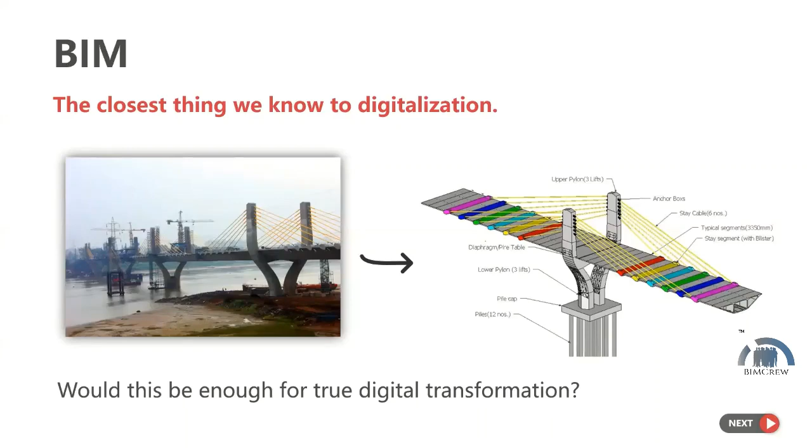I have given you an example of a bridge project and its BIM model here so you can see the BIM process and actual product. So when we evaluate all those ingredients against the BIM execution plan that we commonly find in the recent market...

We found that the BIM execution plan has limited ways to highlight pain points. There is no way to highlight pain points because the approach is basically product based.

All of you have heard that the BIM acronym has three different interpretations. First is building information modeling, building information model, and building information management. So we need to figure out which one is fitting for our needs.

Second, our BIM execution plans are such that they don't support collaboration, and they limit the definition of collaboration.

That we have seen. Third is restricted BIM knowledge. Only a few are well known for their BIM implementation.

The key to implementing BIM in a very good way is to enable it across the entire project base or entire project user base. However, our BIM strategies or BIM execution plans are not prepared in such a way that it percolates the knowledge.

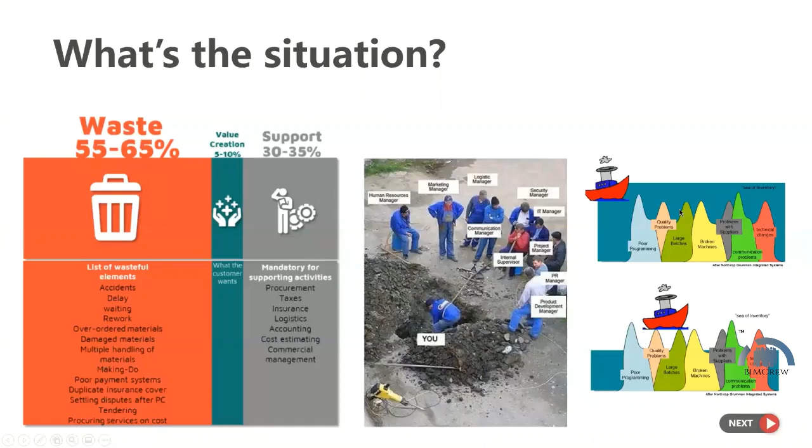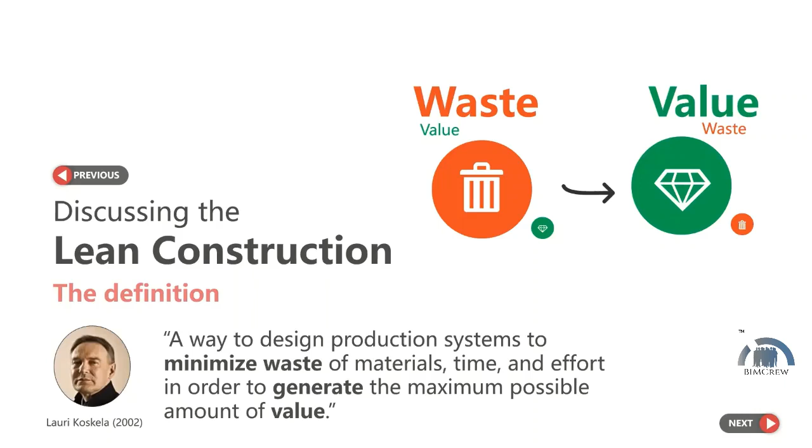That's why we have lean construction practices in the construction field, where we focus on minimizing the waste and increasing the value. Professor Lauri Koskela was one of the founders of lean construction practices, where he took lean processes and infused it into construction.

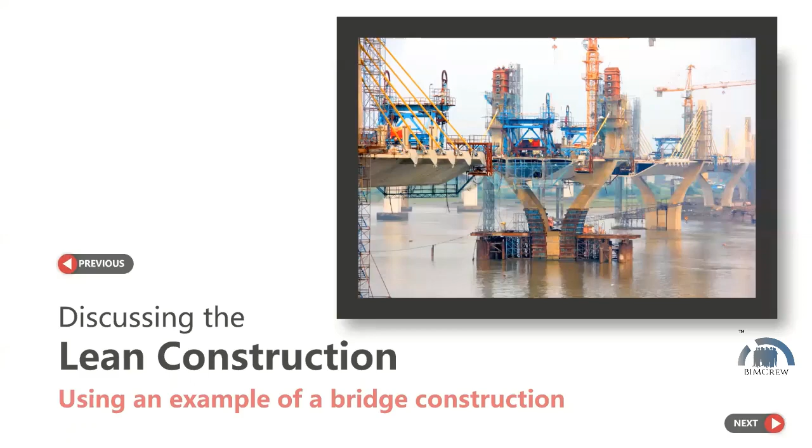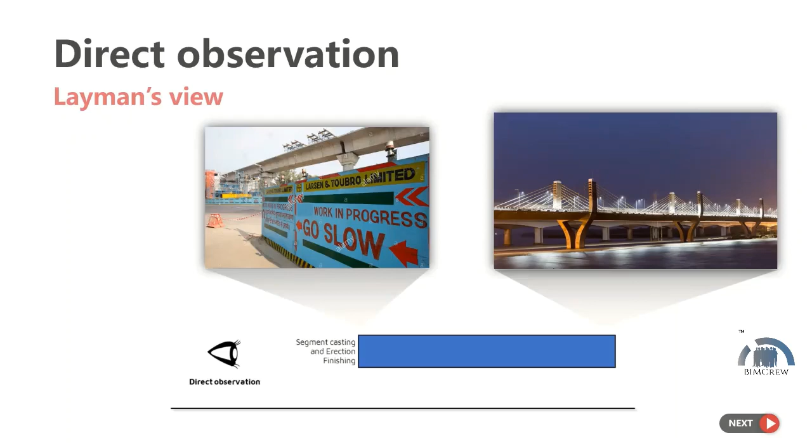If I can quickly elaborate how it works using this bridge construction activity, it could be like this. Whenever a common person, a layman, observes any construction practice, let's say for a bridge construction, he would see a board saying construction is going on, and at the end of the project, he would get the final project and be able to access it.

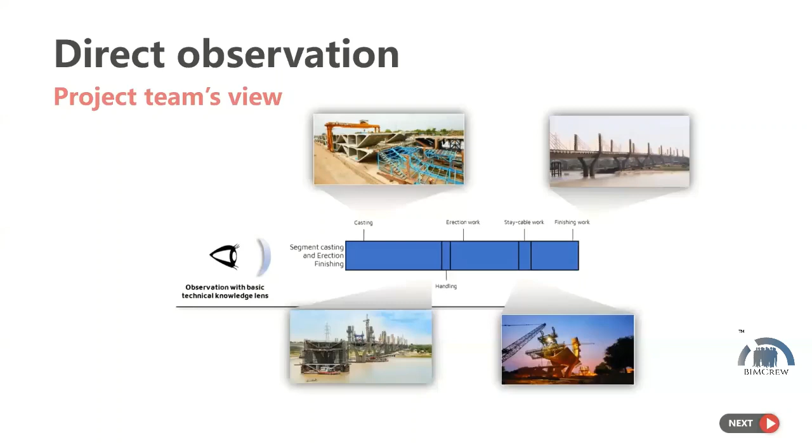However, whenever a project team member views the construction process, they can see in more depth. They will be able to see casting work going on, handling work, erection work, cable staying work, finishing work—all sorts of work they can identify as they have firsthand experience. They develop some technical knowledge-based lens in their eyes so they can see all these processes in chunks. However, the lean view is like this.

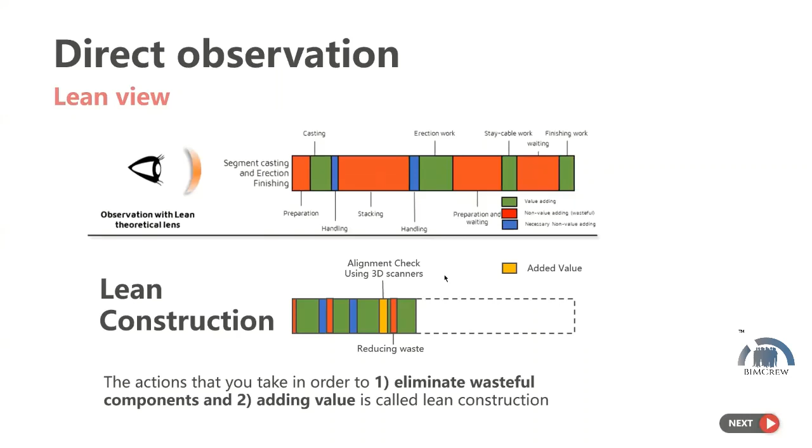In a nutshell, if I want to summarize lean construction, it has six major aspects, or six major fundamental tenets. First, don't try to optimize the chunks. You don't need to optimize one process, you need to optimize the whole to get a better result.

Second is removal of waste. First of all, you need to realize the waste in your processes. There is a very important saying in lean construction: whenever you try to evaluate a process, you need to develop such a critical eye that you can see the waste. Unless and until you realize the waste, you would presume that everything is working fine. So you need to develop a vision and always have a strategy to remove or reduce waste.

Whenever I say waste, it doesn't just comprise construction material or materialistic waste. It also comprises overproduction, waiting time, unnecessary transport, over-processing, excessive inventory, unnecessary movement, defects, and unused employee creativity. All sorts of waste we need to eliminate.

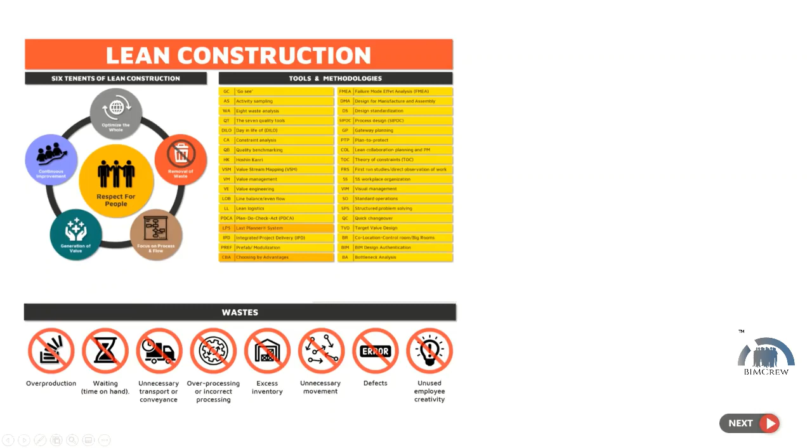Regardless of everything, we ensure that we develop some sort of environment where we have respect for the people. So if I try to correlate this with the McKinsey ingredient list, it will perfectly satisfy the majority of requirements in terms of people and the process aspect of it.

So lean construction develops a vision to see and fix pain points. It provides an interactive environment that promotes collaboration. Also, reskilling and restructuring of the engineering team is quite essential to implement lean construction practices. Fourth one is focus and capture the true value. So as we have mentioned over here, its fundamental focus is on generating the value. So that's where we are getting.

And the last one is connect projects and share lessons learned that we can gather from lean construction. You can see the tool set of lean and lean philosophy over here that can be used in construction. If you want to refer to it, I can share these slides with you. So in a nutshell, it usually takes care of the people aspect and the process aspect of the cycle, but however, it is lagging behind in technology.

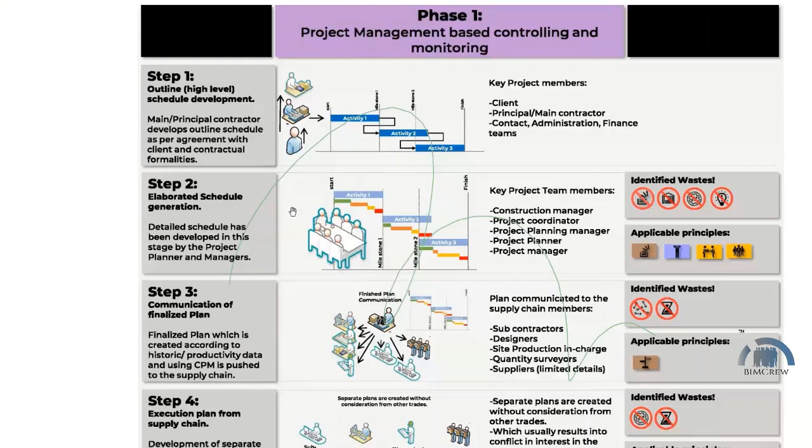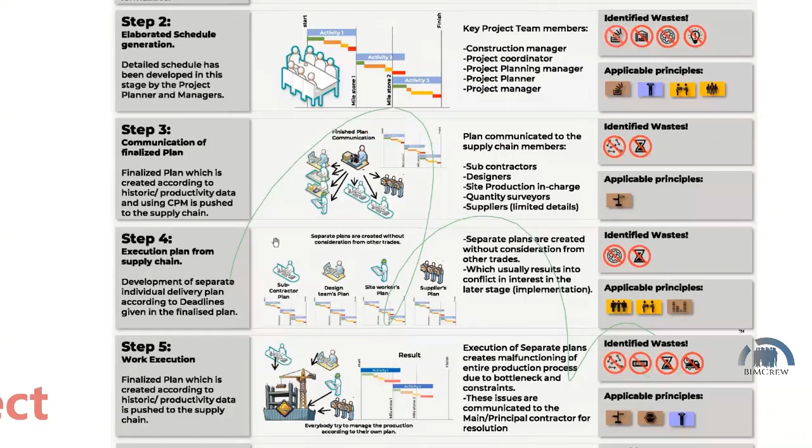So in the process of delivery, this is the previous state before the implementation of lean and BIM integrated practices. They had this baseline schedule, which was further elaborated by the project planner, and then it was communicated to each and every subcontractor. You can see then the subcontractor tries to develop his own plan, and then all together they try to deploy or implement it.

Later, one project coordinator asks all the subcontractors to give feedback about the status of the progress, and later the team arranges a meeting where they try to investigate what exactly went wrong and what were the issues in the implementation.

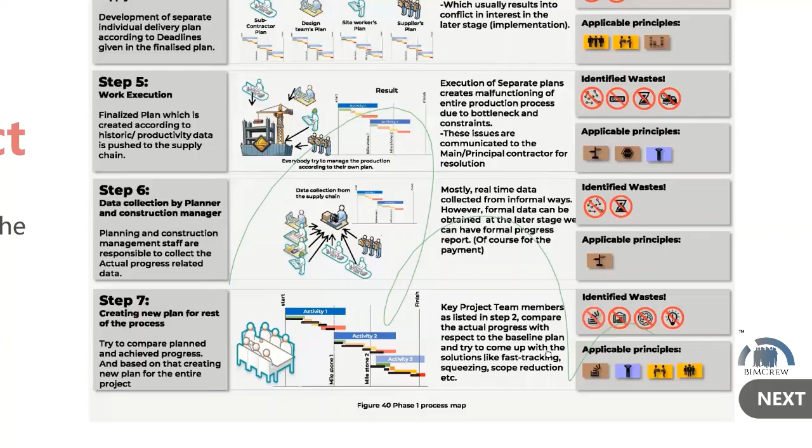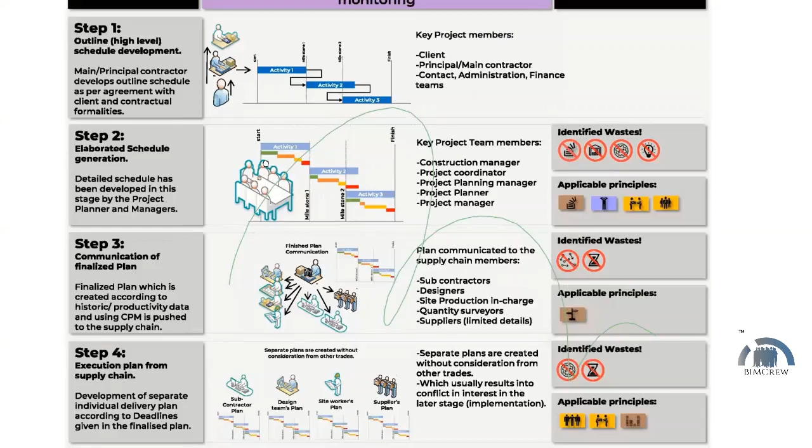However, you can see one another column over here where we have identified enormous waste in this process. You can see they are developing a project plan for the entire project. So that's why they are getting 20,000 line items. Anyway, they are going to shift those 20,000 line items as they progress. So the fundamental waste is overproduction, where they are supposed to be targeting a 3 month or 4 month plan and try to elaborate then, rather than elaborate everything that has been found in the process.

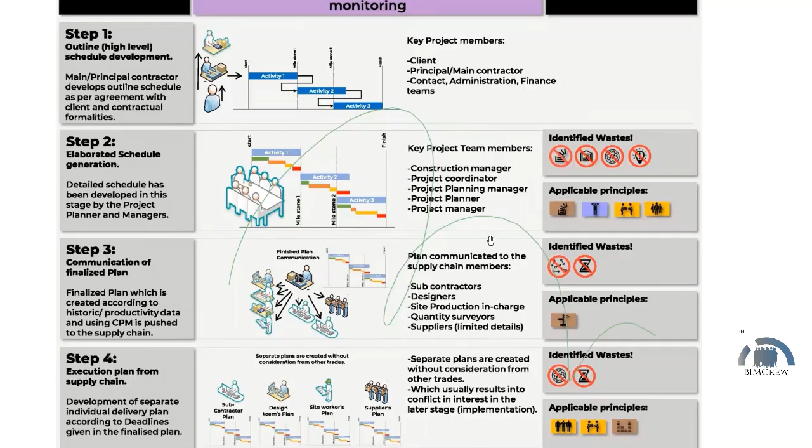Accordingly, you can see all the waste that is there in the process. So what exactly were they doing to the entire system? These are the few observations that we found out. First of all, manual information delivery hampers efficiency. People were running around with all sorts of construction drawings and construction information. They were coordinating using emails and WhatsApp trails and whatever medium they have. Therefore, there was no centralized approach to get information, and the workers or the end users were finding it very difficult to get the information out of the entire system.

The second observation was there are multiple sources of information. As I mentioned, if I want to know the progress of any activity, I can get it from a package manager, as well as from a subcontractor, whatever involved parties are there. However, there were a few instances where we found mismatches in that information. Again, the latency in progress update. Whenever the project manager asks for the information, they have a frequency to deliver it every 15 days or on a weekly basis. So in order to have proactive decision making, I should be knowing the exact current state of my construction activities to get everything sorted.

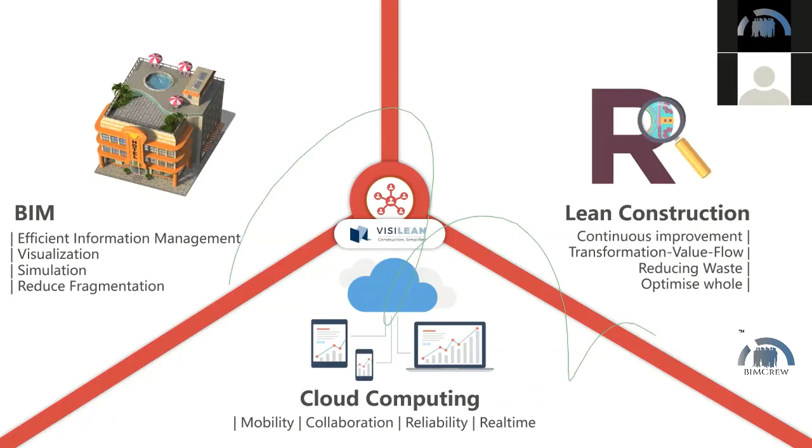And lean construction provides continuous improvement, transformation, value flow, reducing waste, and optimization, and VisiLean provides cloud computing capabilities where mobility, collaboration, reliability, and the real-time nature of the system give a boost to process management. So in the next phase, we delivered Lean BIM integrated project delivery, where we used Revit as a modeling tool, P6 as a scheduling tool, VisiLean as the Lean BIM collaboration tool, and the Nureva wall was used. I'll show you in a while how exactly the Nureva wall works.

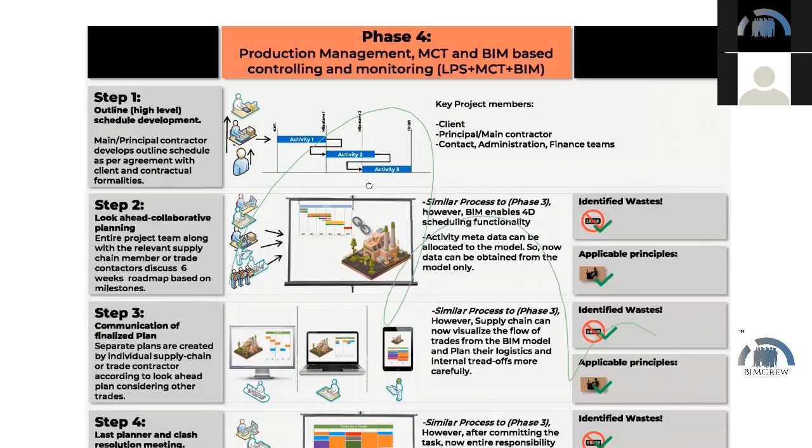But the improved process looks like this. So now we have a baseline schedule where people are in the collaborative room. They are trying to plan and figure out what exactly the process is and where exactly the planning as well as model clashes are going on.

Then in the third step, the subcontractors try to develop their own schedules in conjunction with their fellow subcontractors so that they don't clash with each other. In the fourth step, they try to have a collaborative session where they discuss the clashes. In the fifth step, all the end users were provided with the mobile app where they can update the progress from their mobile itself.

So they can be seen over here where end users are using their smartphone; in other words, they are using mobile technologies to let the higher management know about the current process. And the next step was to evaluate exactly the state of the production. So by implementing these steps, we achieve the waste elimination and also the value generation aspect of lean. I can quickly show you in this.

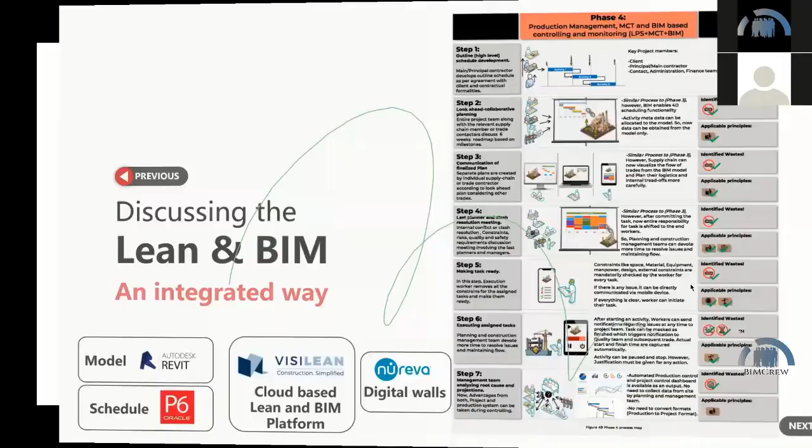I got an alarm that my time is running up.

But yes, so this is the room that we have set up. You can see the 3D model live in the BIM in VisiLean, and you can see the schedule over here, the master plan. So whenever you click on any of the model, it will directly take you to the micro level schedule over here, and you can see whatever activities are going on on the model itself. Also, the information which is necessary to execute that element is linked with this task so that nobody needs to chase the information.

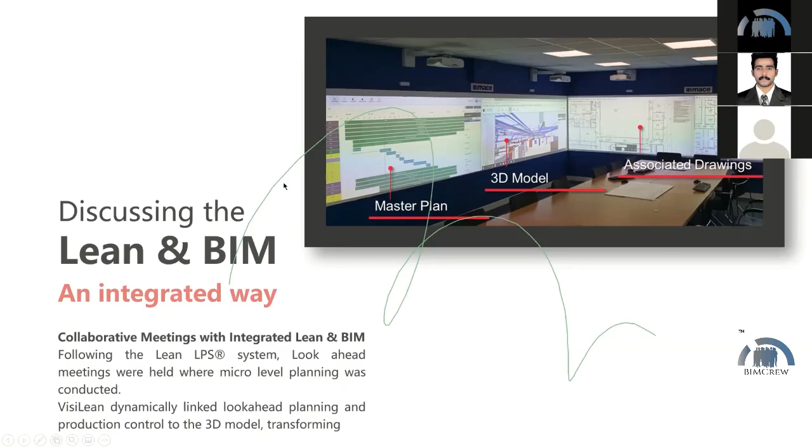Again, this is the snapshot of the integrated project meeting where each and every subcontractor sits with each other and discusses what exactly is going on in the project. Here you can see these two gentlemen. These are the project directors, and they usually set up a meeting where they only focus on the red part.

So this is the screenshot of the visual interface, where with visual management we recognize the status of the task from the color. So whenever you see a red task or red color in the model, it means there is an issue. So the objective of having this meeting is to get rid of this red part.

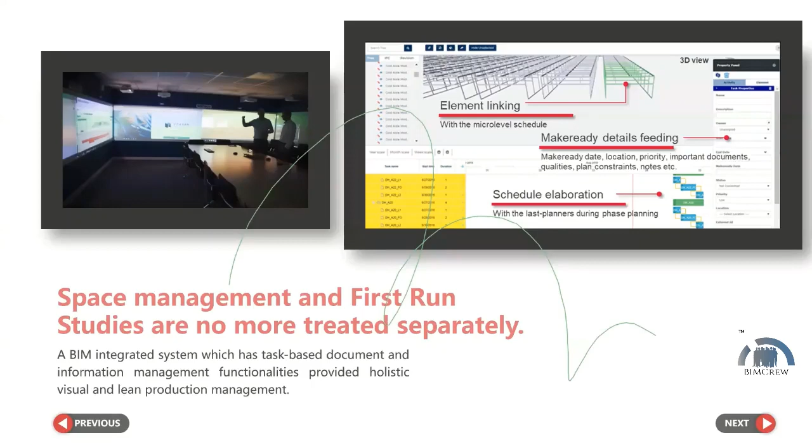Again, you can see in this daily briefing, they always go to the digital environment and try to grasp what exactly is going on in the project, and also make sure that their space management and the logistics are as per the plan or not. They can simply access this software from their smartphone or their mobile computers, any digital device that has Chrome or any sort of browsing tool.

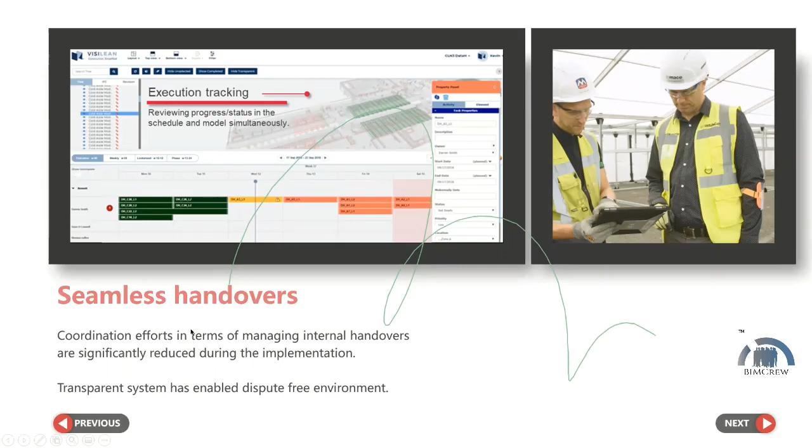Again, the handovers become efficient as they can simply pass on the baton of their completed task. So whenever one subcontractor completes a task, it will automatically notify the subsequent subcontractor, which basically converted into seamless handovers. Again, the field operations were much smoother, as the end user has the capability of updating tasks from their hand, and whenever they have an issue, they can send an alert to the project management team directly from their smartphone. So they don't need to run or chase the project management team.

So what exactly did we gain from this experience? Now we have availability of all the information on their smartphone. They can access all the relevant information from their smartphone itself, which basically eliminated the manual information delivery waste in the process. Again, the multiple sources of information were tackled by the single source of truth provided by the cloud-based environment, which basically increased the reliability of the information and reduced the disputes amongst the project participants.

Again, the latency in project updates was taken care of by the real-time nature of the entire system, where the end user can live update their task and feed the information or task status to their supervisors, which basically resulted in proactive decision making.

Again, the lack of transparency and isolated planning was taken care of by digital collaboration. So we saw that all the subcontractors can access that shared plan from their mobile devices and see their integration with BIM as well. So you can see that all these BIM elements and this entire schedule are visible to the subcontractors as well. So whenever they plan, they don't plan in isolation. They will have a chance to see what exactly is going on before and after that.

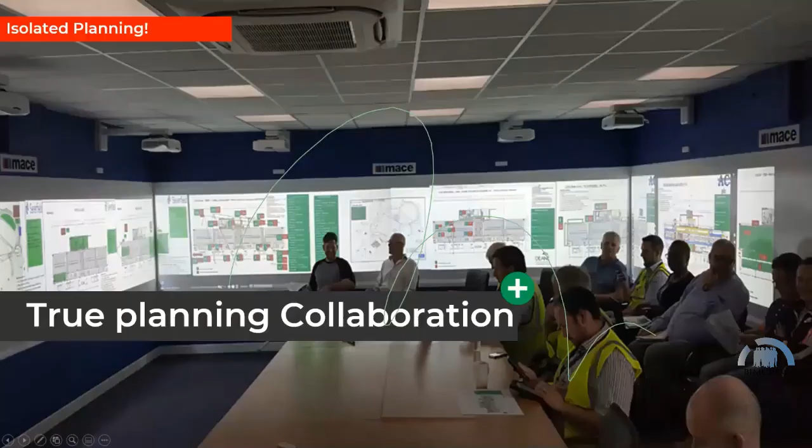As well, there were quite quantitative benefits. We have noticed a 60% reduction in construction defects. The part where I mentioned that we have empowered the end user to notify whenever they have issues really becomes a quality tracker for the process, where people can identify flaws in their processes from the gathered data itself.

Also, they have improved their program efficiency by 43% and their labor spend by 45%. Earlier, there was a need for a coordinator, who basically coordinated the information from one contractor to another subcontractor: now contractor one has finished his job, you can take it on. Now the system takes care of it on its own. So by doing this, we have observed a 45% reduction in labor spend.

So yeah, if you want to know more about what exactly this project was, you can refer to the published case study, where we have mapped the process in depth in this paper. Also, if you are interested in lean construction and BIM integrated project delivery, you can refer to this document, which is published by CIRIA, and you can refer to it.